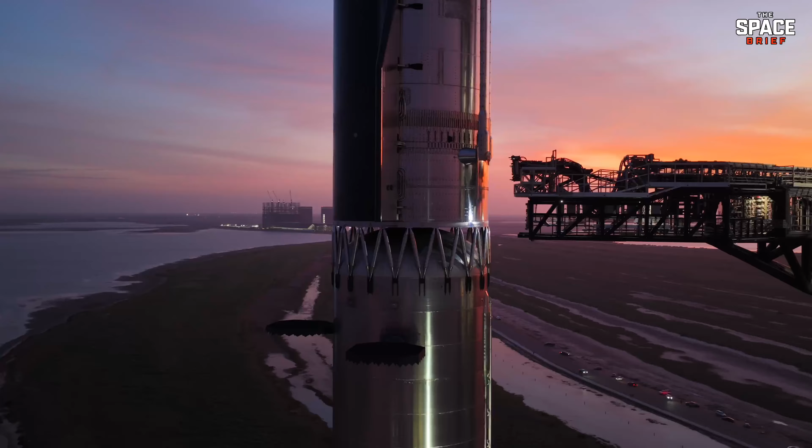SpaceX did something unusual with Raptor 3's fuel lines, and it shouldn't work. This engine weighs just 1,525 kilograms, lighter than the version before it, yet it still produces 280 tons of thrust. Normally, less material means less strength. So how did SpaceX break that rule?

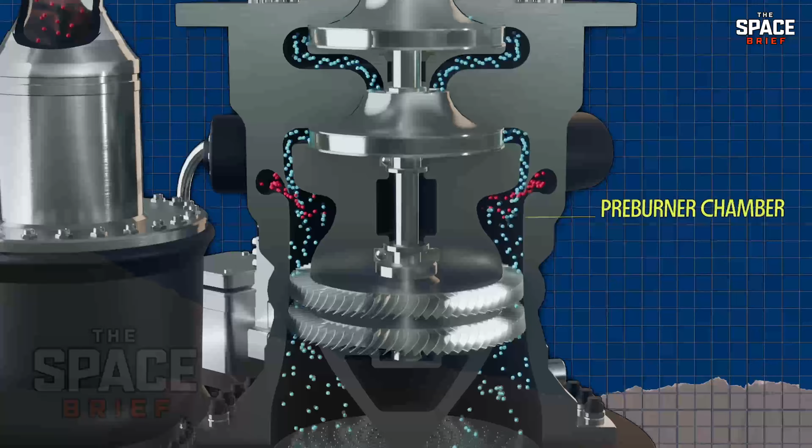The answer isn't in the metal. It's in how they stopped building the engine and started printing it instead. Here's what that actually means.

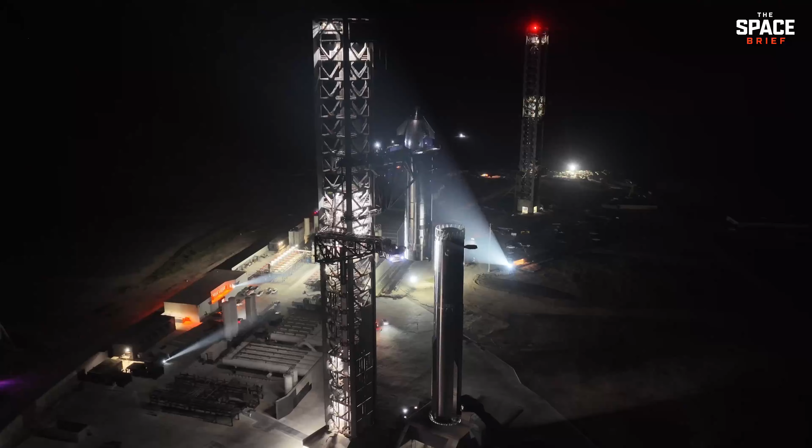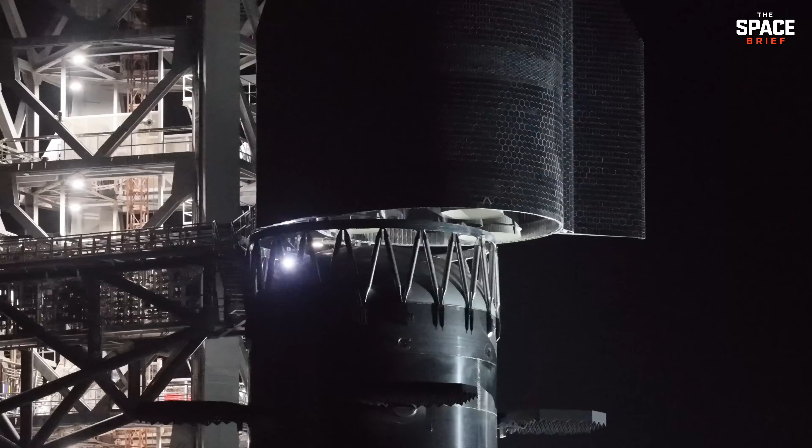Here's the problem SpaceX had to solve. For decades, rocket engines have been the slowest part of building any rocket. Not the tank, not the hull, the engine. Each one is a maze of thousands of fuel lines, sensors, valves, and manifolds. Traditionally, skilled technicians spend months welding and bolting all of that together by hand, one joint at a time.

Think about what that means in practice. You can build a rocket's body in weeks, but if the engine takes months, the body just sits there, waiting. The fastest part of your factory is only as fast as its slowest part. That's not an opinion. That's just how assembly lines work, whether you're building rockets or cars.

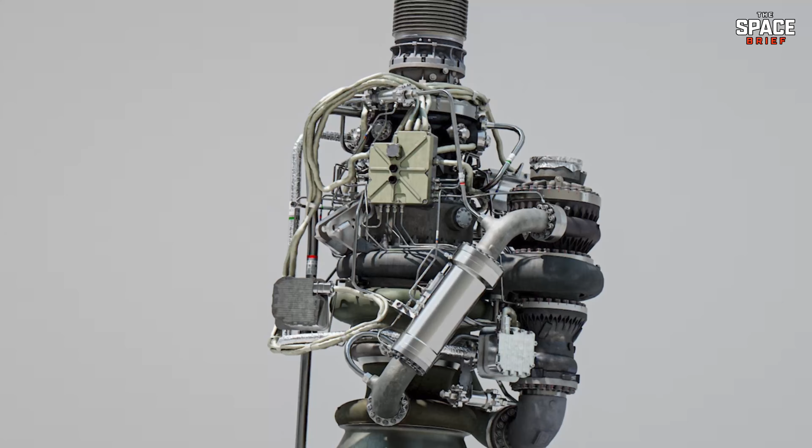So if SpaceX wanted to build Starships the way Tesla builds cars, on a line, at scale, they had one massive obstacle standing in the way: Raptor, the engine. Raptor 2, the version flying on most Starships until recently, still looked like a traditional rocket engine, covered in exposed plumbing, external tubing, bolted joints everywhere you looked. Beautiful engineering, but slow to build. Painfully slow. Now, let's talk about why that had to change and how SpaceX changed it.

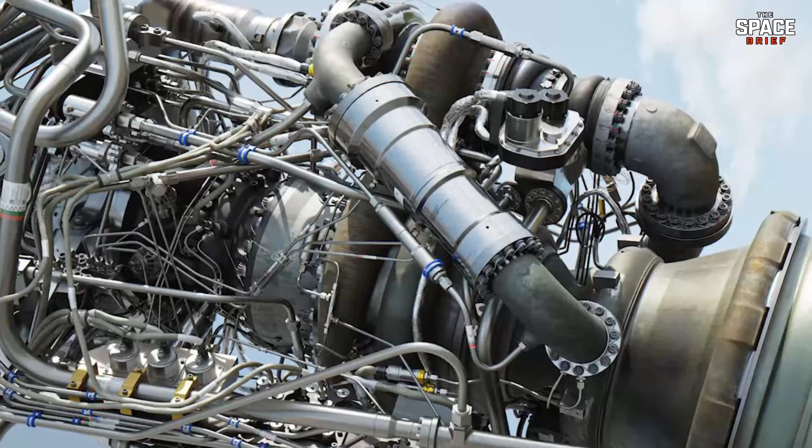Not by fixing the engine first, but by rebuilding the entire factory around it. The ugly years were the point. Rewind to 2019 and 2020.

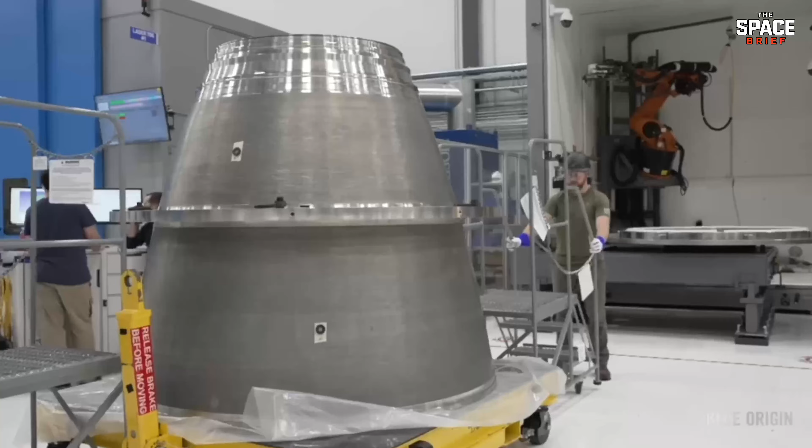If you watched the early Starbase live streams back then, what you saw looked almost embarrassing. Workers manually running flux-core arc welding torches in the open Texas wind. The prototypes that came out of that process looked like dented, crinkled water towers. Fans joked about it, critics mocked it. But that rough, ugly phase wasn't a failure.

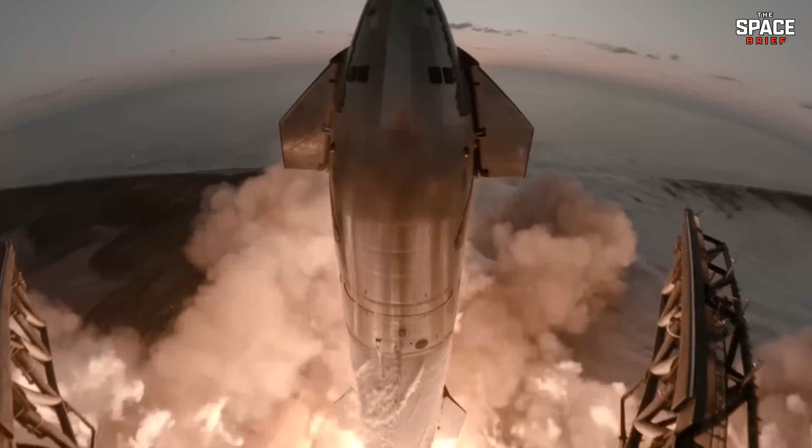It was a deliberate decoy. SpaceX needed to lock in one critical number first: the exact structural dimensions of the 9-meter stainless steel ring that would become the backbone of every Starship and every super heavy booster ever built. You can't automate a process until you know exactly what you're automating. So the crude welding phase existed to finalize the geometry. Once that number was locked, everything changed.

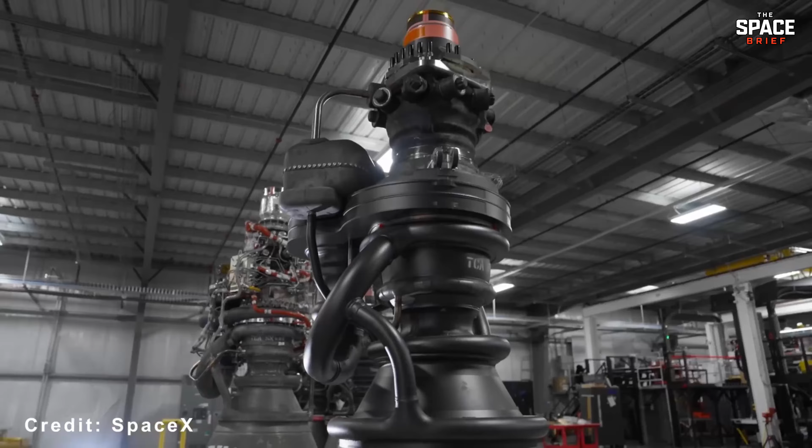SpaceX sealed off the entire manufacturing pipeline into a massive, climate-controlled structure. No more open-air welding in coastal wind and humidity. Why does that matter? Because moisture, salt air, and wind shear are exactly the conditions that introduce tiny pockets of porosity into a weld. Microscopic weaknesses that can turn into catastrophic failures under the extreme pressure of spaceflight. By sealing the environment, SpaceX eliminated an entire category of failure before it could happen.

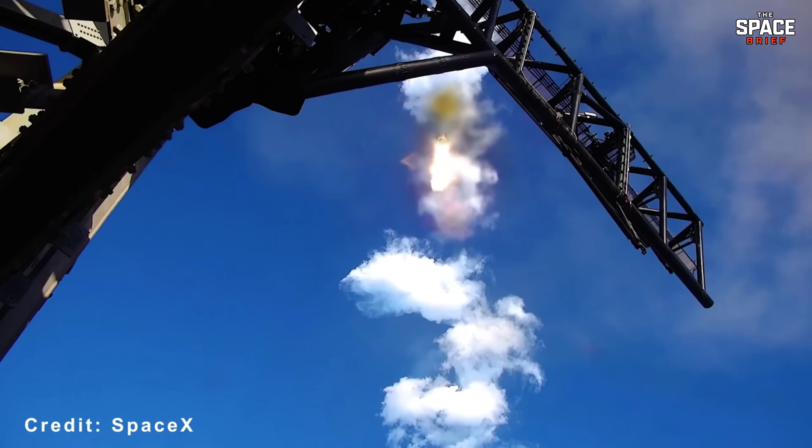Inside that fortress, the philosophy flipped completely. Rockets stopped being stationary objects that workers climbed all over with scaffolding. The factory became a living conveyor system. Steel sheets roll in. Automated stations form them into rings. Robotic megabays rotate massive hull sections with sub-millimeter precision.

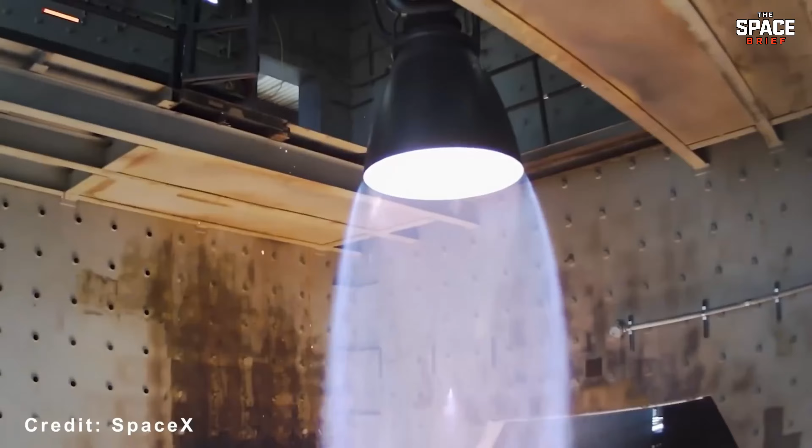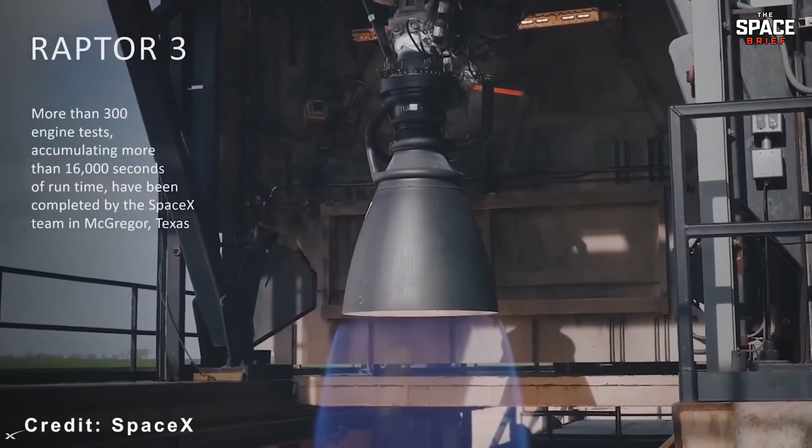That still leaves one question unanswered. How do you join 9-meter steel rings fast enough to keep up with that kind of speed? That answer is where things get genuinely strange. A laser that vaporizes its own path.

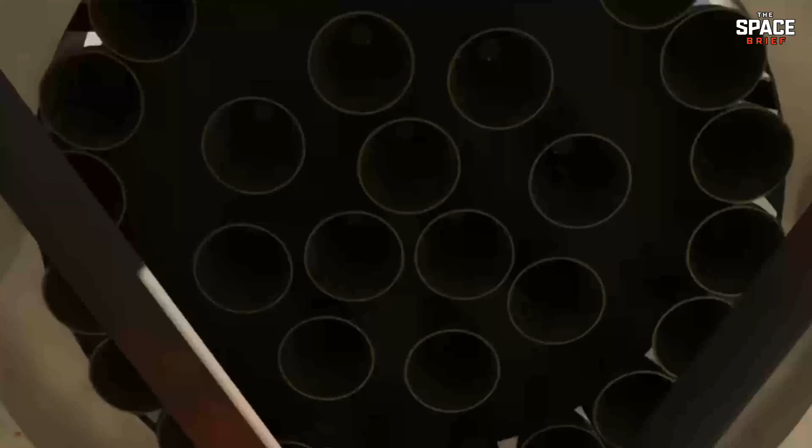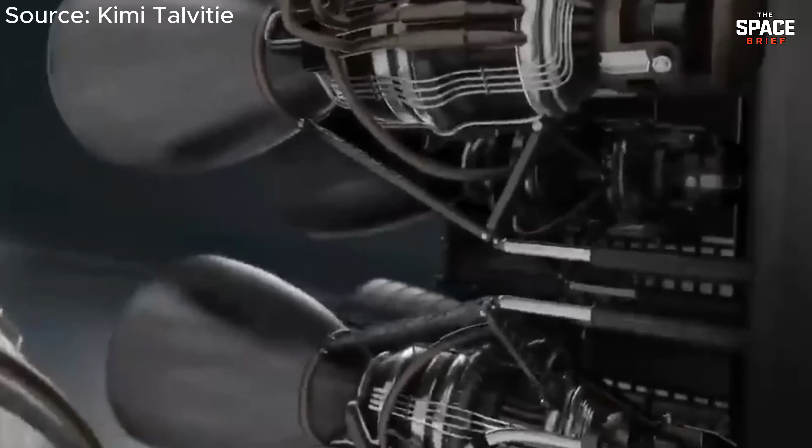Traditional aerospace has two main options for joining thick metal sections: multipass arc welding, slow and requiring layer after layer of melted metal, or friction stir welding, incredible technology, used on things like the space shuttle's external tank, but mechanically brutal, demanding massive physical force and heavy backing jigs just to push through the joint. SpaceX decided neither was fast enough, so they built something else.

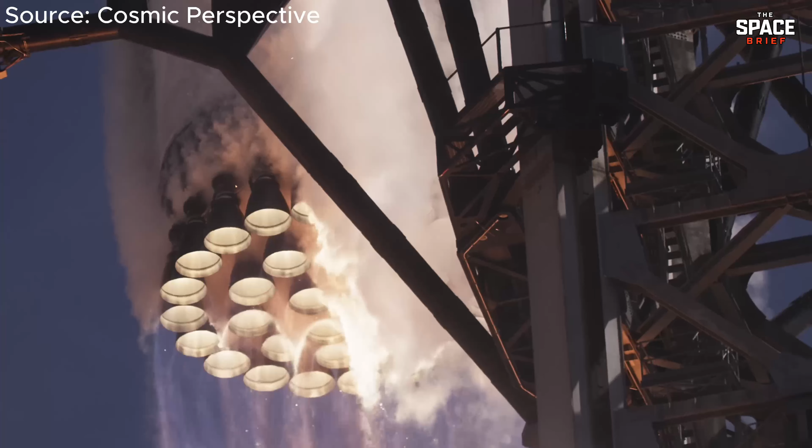High-power automated laser beam welding using a mechanism called keyhole welding. Picture it this way. A normal weld melts metal from the surface down, layer by layer, over multiple passes. That exposes a wide area of metal to heat for a long time. A keyhole weld does something completely different.

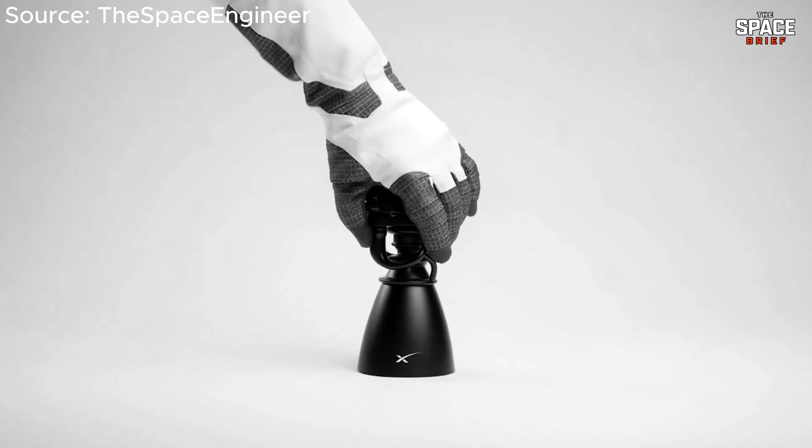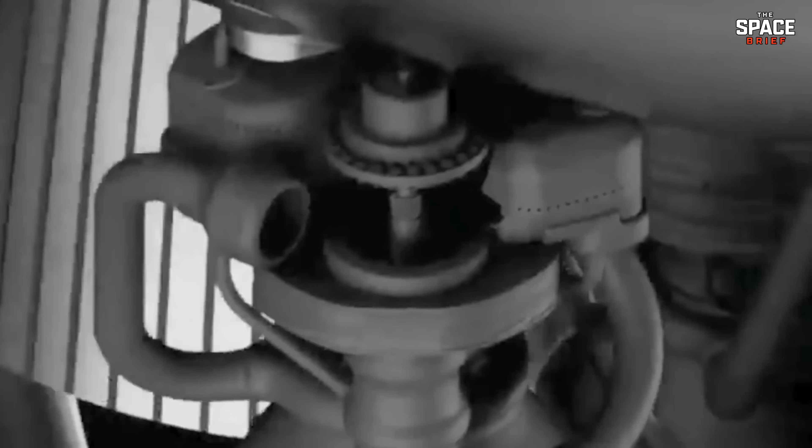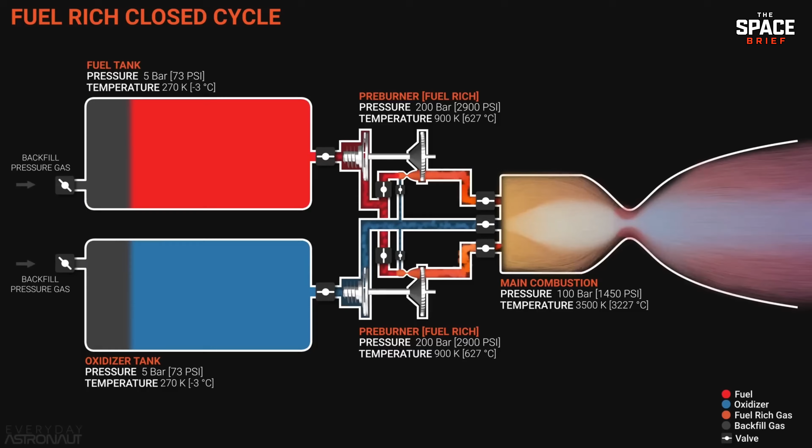A tightly focused, multi-kilowatt laser beam instantly vaporizes a tiny hole straight through the joint, all the way through the thickness of the steel in one shot. That vapor cavity becomes a channel, carrying the laser's energy through the entire seam at once. As the robotic arm glides along the ring, molten metal flows in behind that moving hole and solidifies into a deep, clean joint. A process that used to take hours, sometimes days, gets compressed into minutes.

That speed creates a second, less obvious advantage.

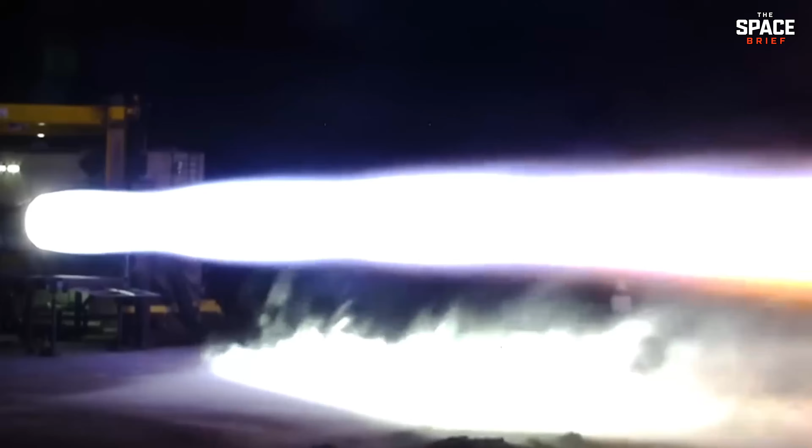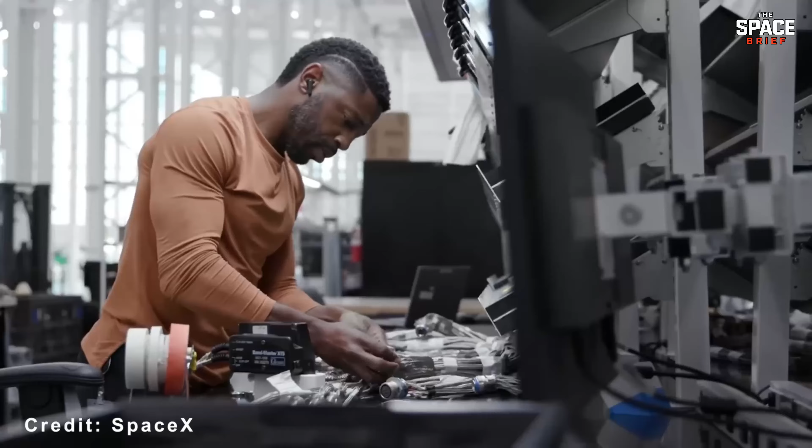Every weld generates heat, and that heat spreads outward into a zone around the joint called the heat-affected zone. In slow, traditional welding, that zone gets large, and the extended heat exposure changes the microscopic crystal structure of the steel, making it weaker and more brittle. To compensate, engineers have always had to make the surrounding metal thicker just to survive the loss of strength. Thicker means heavier. Heavier means less payload to orbit.

Because SpaceX's laser moves at several meters per minute, the heat gets applied and gone almost instantly. The heat-affected zone shrinks to something microscopic. The steel right next to the weld keeps nearly all of its original strength. That lets SpaceX drop the hull's steel thickness from 4 millimeters down to 3.1 millimeters.

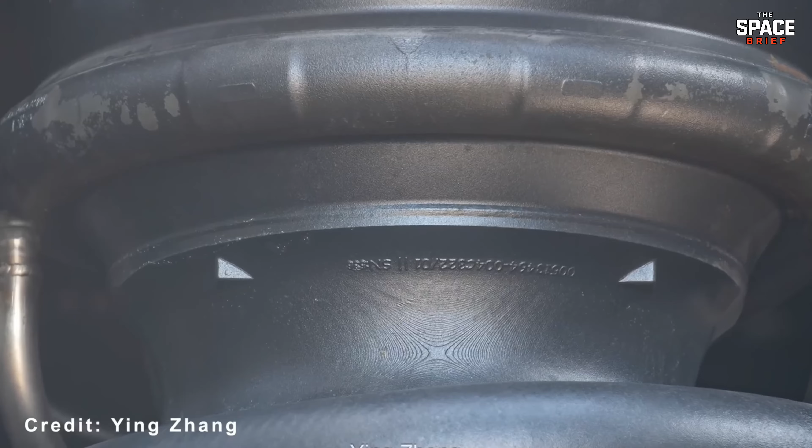That's it. But across a 50-meter tall ship and a 70-meter tall booster, that 1 millimeter strips out roughly 20% of the entire airframe's mass. In a business where every kilogram saved is a kilogram of cargo gained, that number is enormous.

Speed and thin walls create a new problem, though. What happens when the weld itself isn't perfectly smooth? The step everyone else skips.

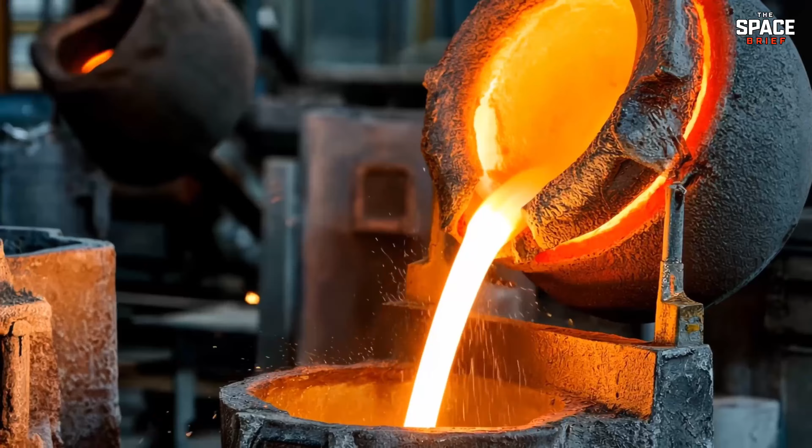Even a flawless laser weld can leave behind a microscopic ridge, a tiny distortion right where the two sheets fuse together. In traditional aerospace, someone would grind that down by hand. Slow, imprecise, and it tends to shave metal unevenly, right in the one spot you can least afford to weaken.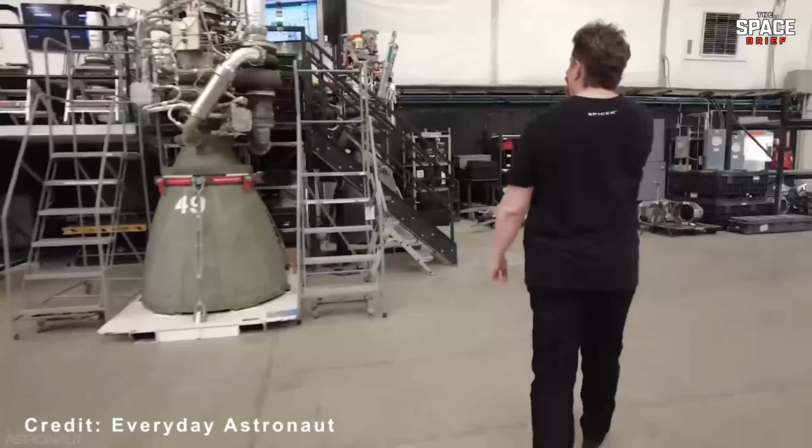SpaceX replaced that step with automated planishing. Directly behind the welding head, high-pressure rollers clamp down on the fresh seam and physically hammer it flat under enormous force. This does two things at once. It eliminates the tiny surface irregularities where stress could concentrate and eventually crack, and it cold works the steel, realigning its internal crystal structure so the weld becomes as strong or stronger than the metal around it.

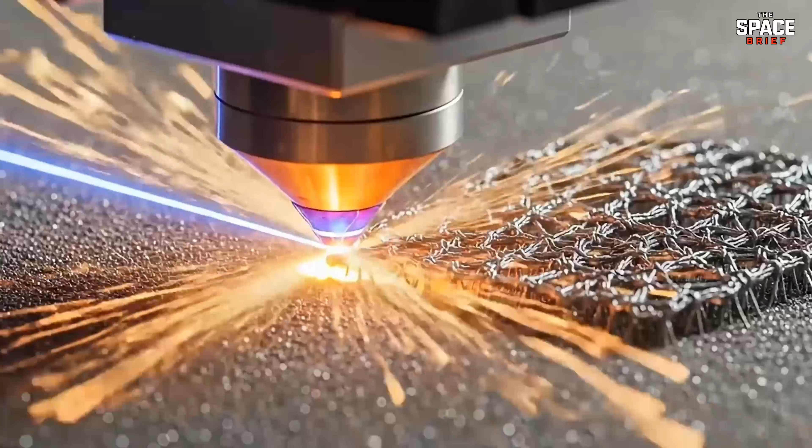This is also where that smooth, mirror-like finish on modern Starships comes from. And that finish isn't just for looks. It reduces aerodynamic drag during the violent heat of re-entry.

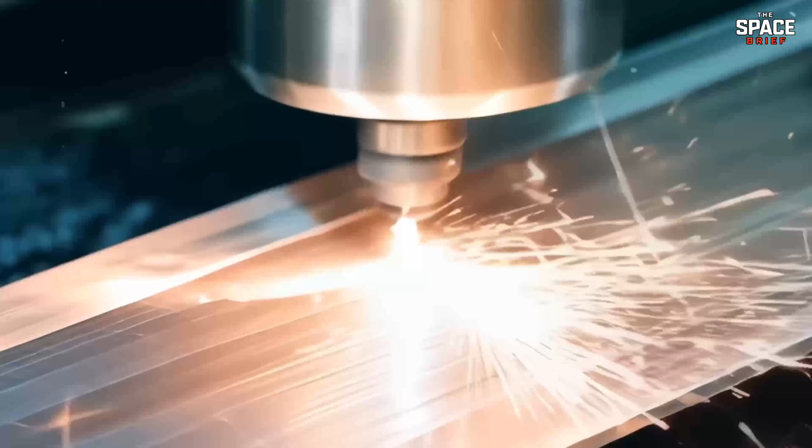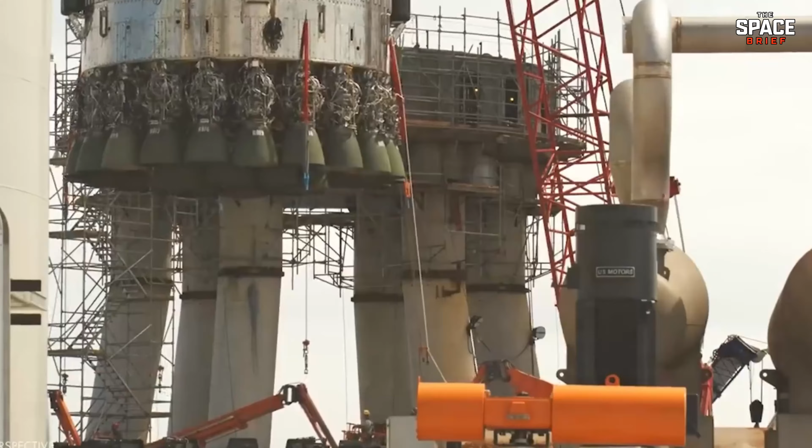This is also where SpaceX diverges from basically every legacy aerospace company on Earth. In traditional manufacturing, inspection happens after the fact. Weld first, then roll in a massive X-ray or ultrasound rig, scan the section, and wait days for inspectors to review the images by hand. If something's wrong, the entire production line stops cold.

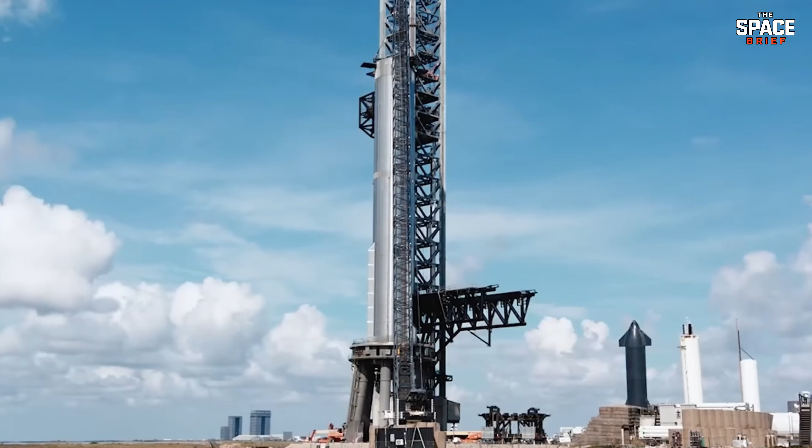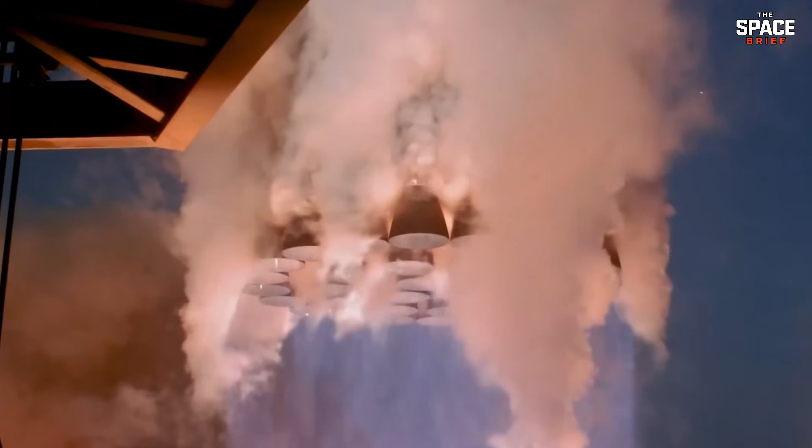SpaceX doesn't wait. High-frequency digital sensors are mounted directly onto the robotic welding arms. As the laser moves forward, those sensors scan the molten pool and the solidifying seam, millimeter by millimeter, in real time. Custom computer vision models analyze the thermal signature, the acoustic emissions, even the internal density of the metal as it cools. If a microscopic defect starts to form, the system catches it instantly and adjusts on the fly. By the time the robot finishes its pass, that section of hull is already structurally certified, not tomorrow, the second the weld is done.

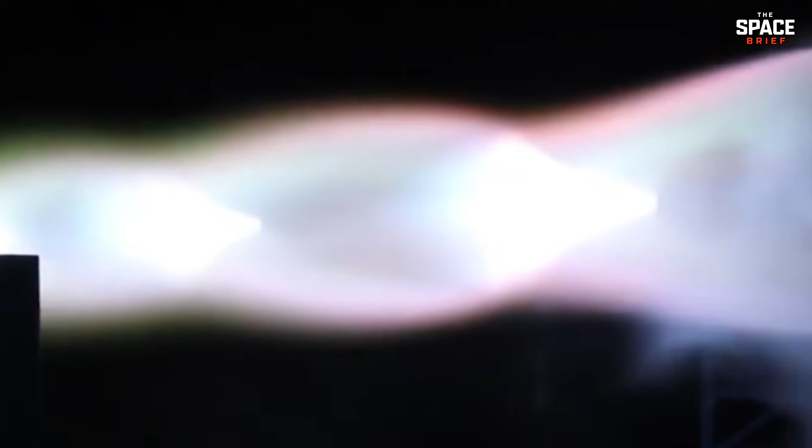At this point, SpaceX has solved the hull. They can build the body of a rocket faster than anyone in history, but a fast hull means nothing if the engine bolted onto it still takes months to build, and that's exactly the wall SpaceX ran into next. Steel rolls in one end of the factory, and a fully welded, inspected hull rolls out the other end in a fraction of the historical time.

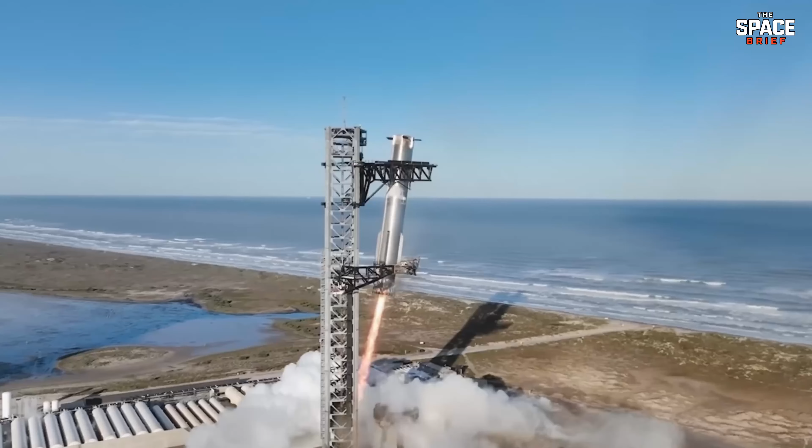But Raptor 2 still belonged to the old world. Thousands of individual components, tubing running across the outside, bolted joints everywhere, each one requiring careful manual assembly. A hull built in days sitting next to an engine built in months. The line could only move as fast as its slowest station, and that station was still the engine.

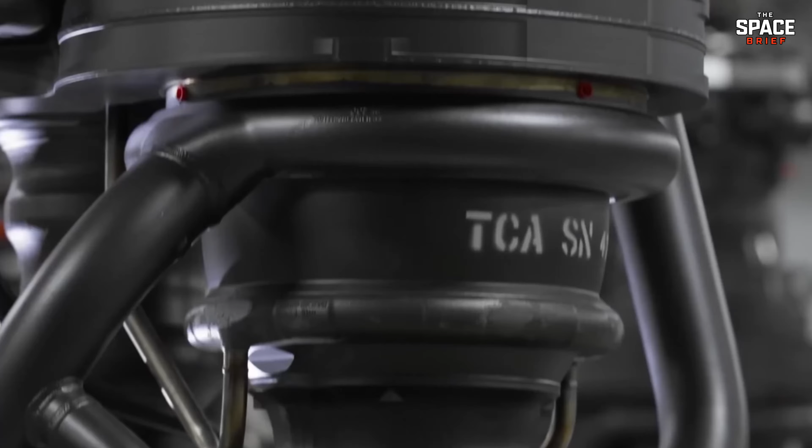So when SpaceX unveiled the production version of Raptor 3, it wasn't a routine upgrade. It was a redesign built around one question. How many separate parts and welds can be eliminated entirely?

Set the two engines side by side, and the difference is immediate. Raptor 2 is layered in visible tubing and joints. Raptor 3 looks sculpted, like it was carved from a single block of metal. In a very real sense, that's exactly what happened.

The engine that gets printed, not built.

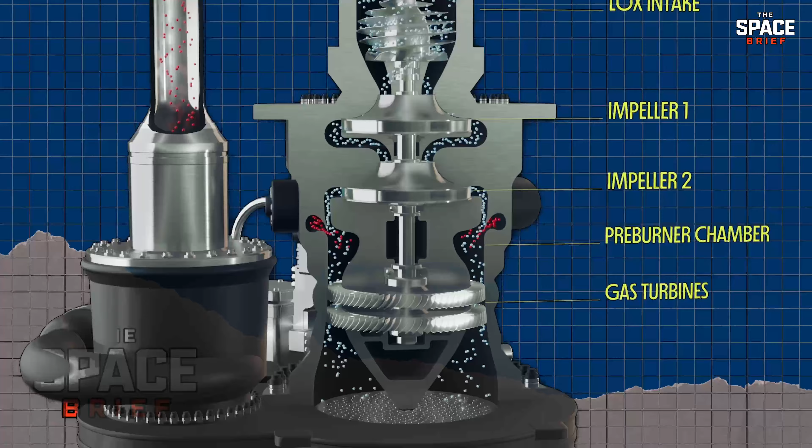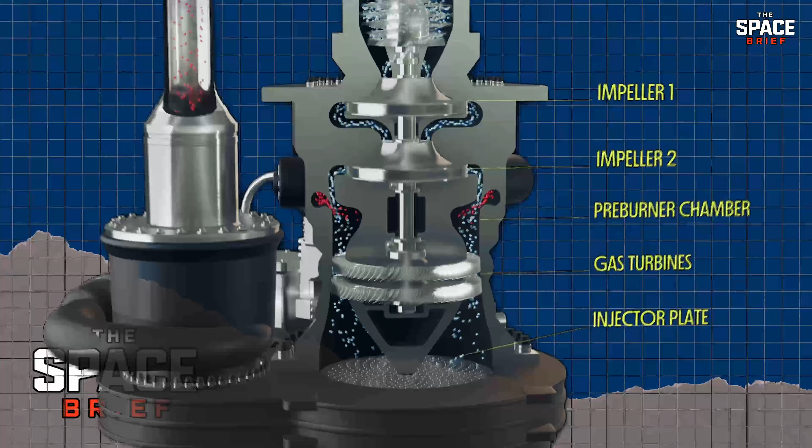Instead of manufacturing thousands of individual components and joining them one by one, SpaceX uses direct metal laser sintering to print entire subassemblies as single, solid structures. Internal plumbing, propellant passages, the regenerative cooling channels that keep the combustion chamber from melting itself—all of it is built directly into the walls of the turbo pumps and combustion chamber as the part is printed layer by layer.

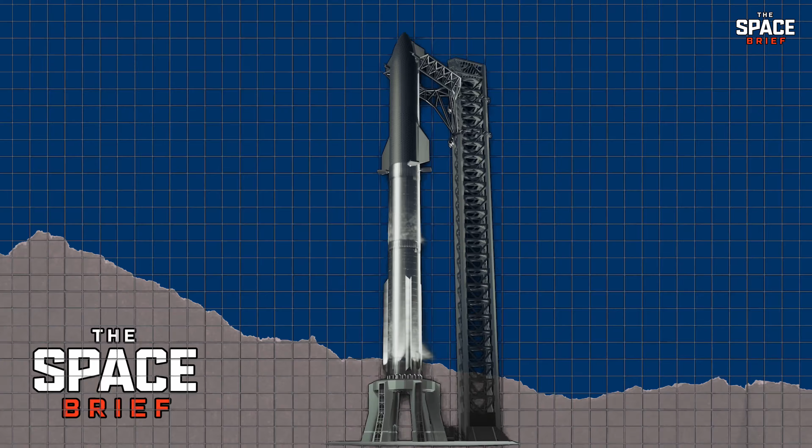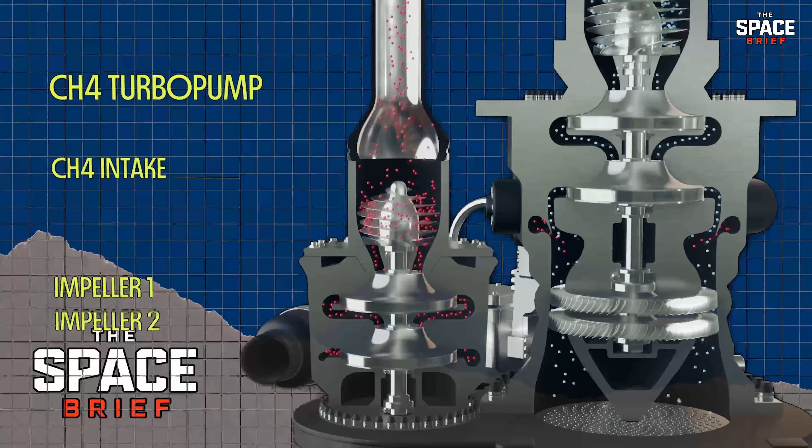No external pipes bolted on afterward, no welds joining dozens of separate tubes together. Every weld in a traditional engine is a potential failure point. Every joint is one more place a leak could start, one more spot needing its own inspection. Raptor 3 doesn't eliminate those risks through better testing—it eliminates them before manufacturing even begins, because the parts that used to be joined together simply don't exist as separate parts anymore.

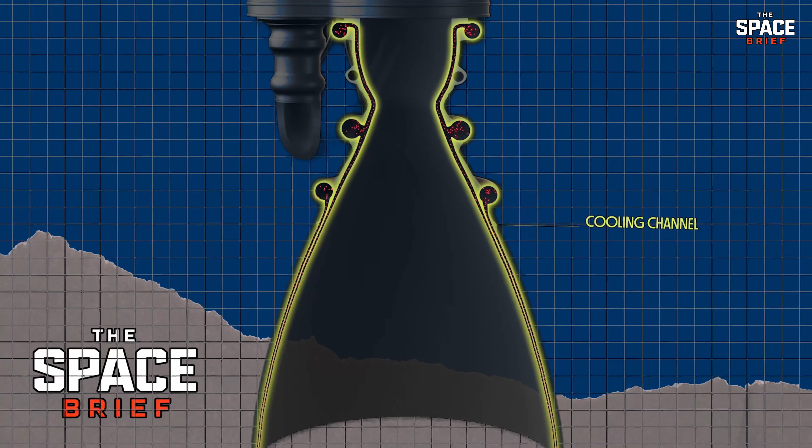Now the paradox from the opening comes back into focus. This engine comes in at roughly 1,525 kilograms, lighter than its predecessor, while still generating close to 280 metric tons of thrust. In almost every engineering discipline, removing material means losing strength. So how does an engine get lighter and still hit the same brutal thrust number?

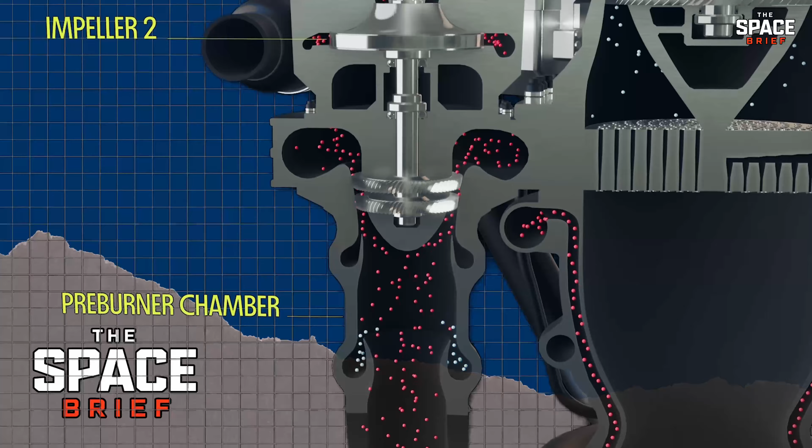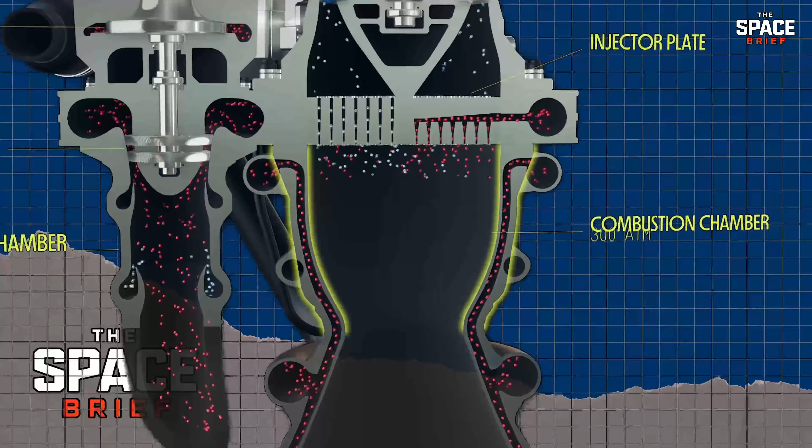SpaceX isn't breaking that rule. They're sidestepping it by removing weight that was never structurally necessary in the first place—the bolts, the redundant tubing, the joints, the material that existed only to connect one separate part to another. When those connections disappear, so does their weight, without touching the parts that actually generate thrust or contain pressure.

One more advantage hides inside this design. The integrated cooling passages don't just keep the engine alive during ascent—they also let Raptor 3 survive the brutal heat of atmospheric re-entry without a separate external heat shield layer bolted onto the engine bay. One integrated system doing a job that used to require two.

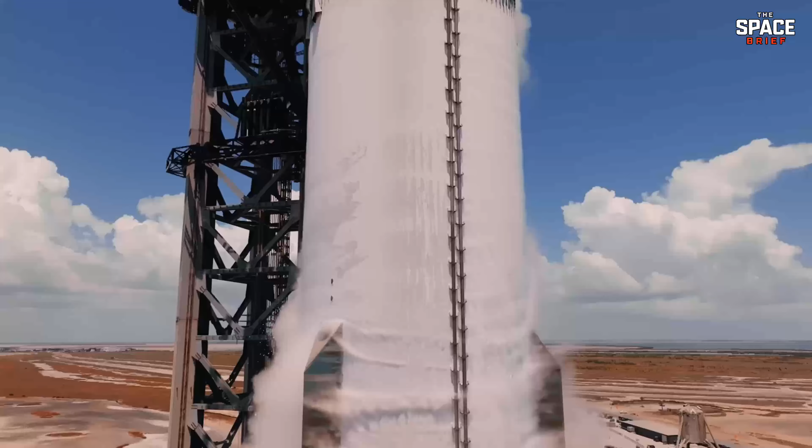So what was Raptor 3 really built for? It's easy to assume this engine was designed purely to be more powerful, a better piece of rocket science, and it is all of those things. But that's not the primary force driving the redesign. Raptor 3 wasn't primarily engineered to push performance numbers higher.

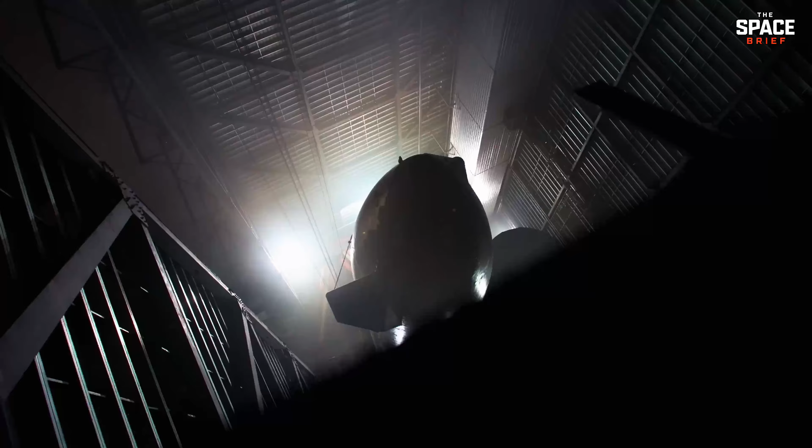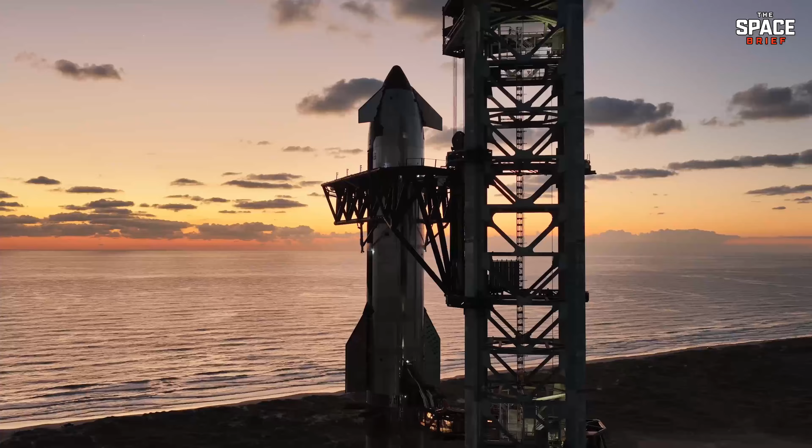It was engineered to move through a production line at the same speed as the hull surrounding it. Every weld removed isn't just a safety improvement—it's a manufacturing step removed, one less thing standing between raw material and a finished, flight-ready engine. Raptor 3 wasn't designed for the rocket. It was designed for the factory line.

That single shift changes what producing rockets means for SpaceX. Traditional aerospace treats propulsion as a handcrafted specialty, something that can't be rushed. SpaceX just built an engine that moves at the same pace as the airframe around it. When engine and hull share the same production timeline, you're no longer building rockets one at a time. You're building them the way a factory builds anything else—continuously, predictably, at scale.

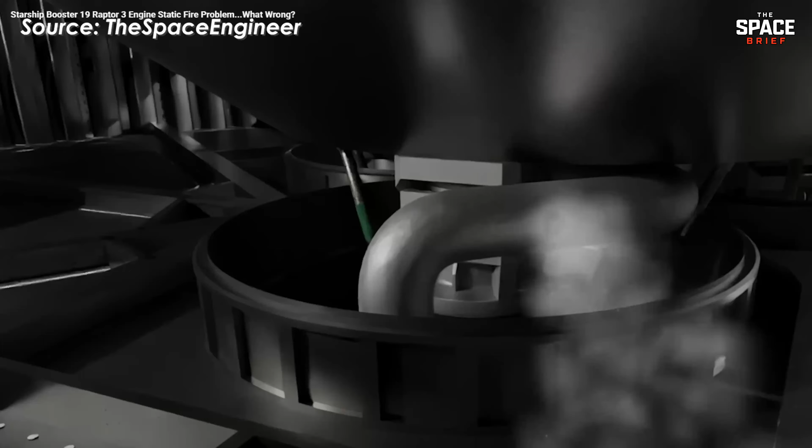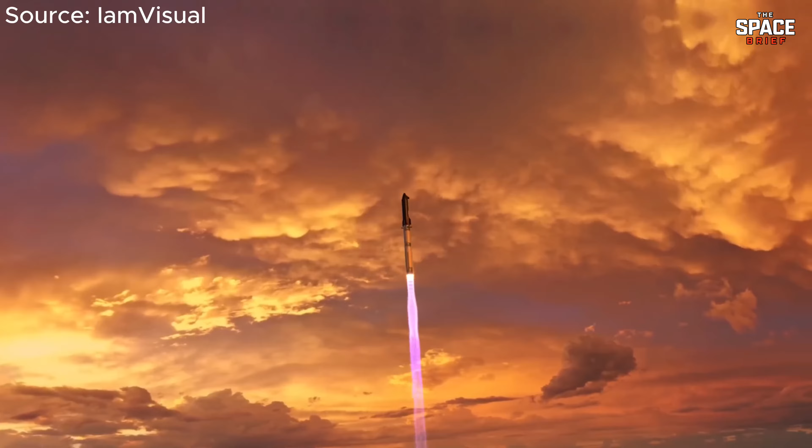A good engineering story doesn't get to skip the uncomfortable parts. All of this precision—the laser welding, the real-time inspection, the printed engine internals—none of it makes a rocket immune to failure. Just last week, a Starship stacked with all of this technology came within 3 seconds of liftoff, before its automated systems detected that 4 of the booster's 33 Raptor engines failed to ignite properly. The system shut down the remaining 29 engines instantly, keeping the entire 5,000-ton vehicle safely on the pad.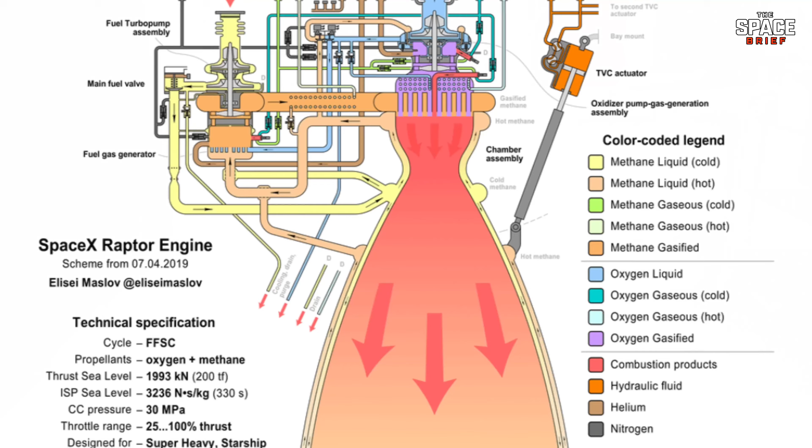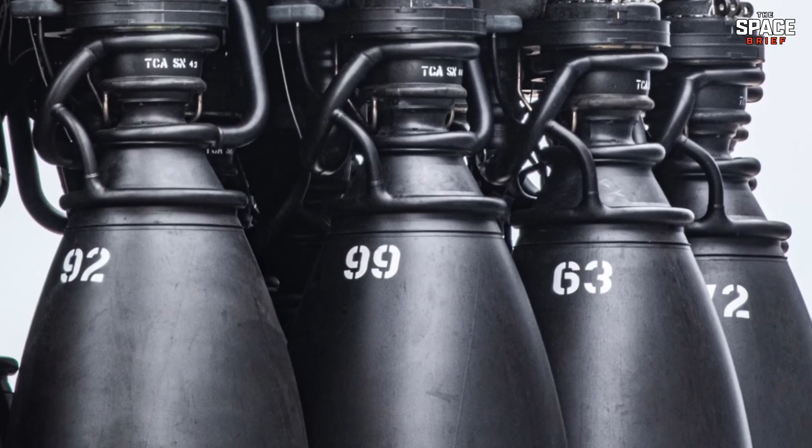2 of those engines are now being replaced before the next attempt. Even an engine built to be simpler, lighter, and faster to manufacture than anything before it can still fail as an individual unit. Precision manufacturing reduces the number of things that can go wrong. It doesn't reduce that number to 0, and Raptor 3 isn't the exception that finally makes it so.

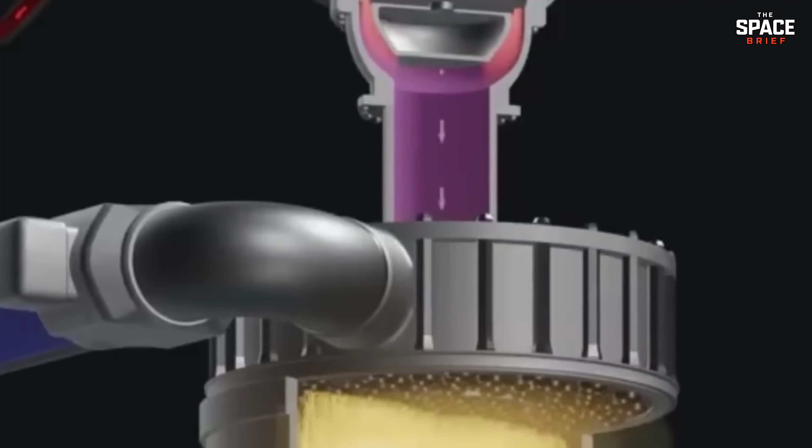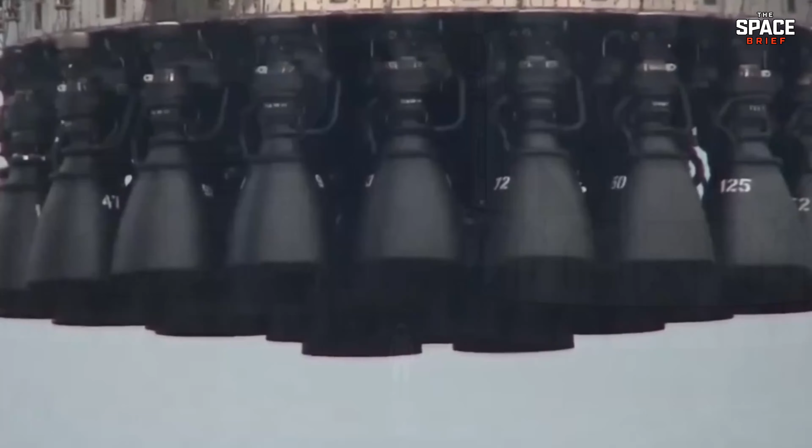What it does change is what happens after a failure like that. When an engine is a single printed structure instead of thousands of hand-assembled parts, diagnosing and replacing it doesn't take the months it once would have. The same philosophy that builds these engines fast is the same philosophy that gets a fixed one back onto the vehicle fast too. That's Raptor 3, engineered for the factory floor, not just the flight.